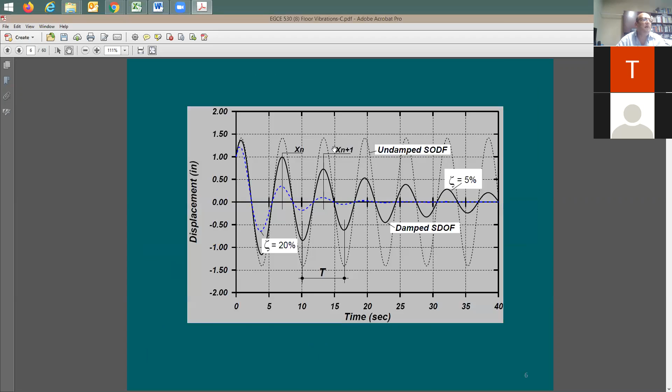Because usually when you have any vibrating system, the final vibration is going to be a combination of all the modes. So at the same time that mode 1 is happening, also some of mode number 2 is also going to be happening.

So just imagine that mode 1, the pure mode 1, is going to happen when the entire beam is just going to be coming up and down like this, right? It's going to be going like this, up and down. At the same time, while it's going up and down, also a little bit of mode 2 is going to happen. And we call this the participation factor.

If you recall this term, participation factor, yes or no? Yes. Okay, all right. So this is also one of the things that's going to be happening, that you have a combination of all modes happening at the same time. So the final vibration is going to include lots of other modes.

But heavily, it's going to be mode 1. So mode 1 is going to be like the control one that you can see with your eye. Maybe combination of mode 1, 2, and 3, maybe the fourth mode also is going to happen. So you're going to feel it that while the beam is just going up and down, also a little bit of mode 2 is happening.

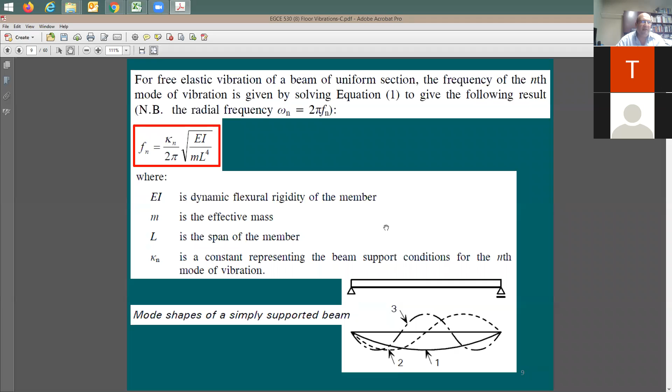So you see here, the final case, unfortunately it is tough to draw it here for you, but I will do my best. Let's say the beam is going to be coming like this, mode 1, and at the same time it's going to be doing this. Here is going to be right in the middle, and then continue this way.

I'm exaggerating here for this deformation. This deformation is going to be very small. So something like this is going to be also happening, if this makes sense to you.

Or maybe something like this, and also something like this. Let's say this is going to be going down, it's going to be going up. So this point is going to be right here in the middle, and this point is going to be like this. So what I'm drawing here is a combination of mode 1 and mode 2, if this makes sense to you.

Mode 1 is going to be just like this solid line. At the same time, mode 2 is going to be happening. And mode 2 means that this piece is going to be going up and this piece is going to be coming down like this.

So another way we could think about it is like when we do the mode analysis and we consider the top 90% of modes that contribute to the structure. And that's why we consider the top 3. And also mode 3 is also going to be there, but let's say 90% is going to be coming from mode number 1, roughly. And maybe 3% coming from mode number 2.

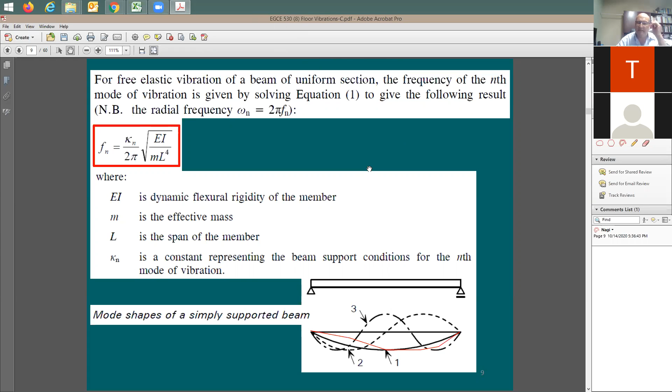So we discuss this issue, and then we say the frequency for a beam or a system can be determined with this equation here, after Allen and Murray, which they developed. These people here, they developed this research report that we're going to be looking into. You just say, if you know the deflection of the beam under sustained loads, all you need to do to find out the frequency is F sub n equals 0.18 times the square root of G over delta. Why do we say sustained load?

Why don't we use deflection for live load here? Do you guys have an answer for me?

Anyone can help me with this?

We do it for sustained load because live load can change as compared to time. For example, if it's an office building, there will be live load in it most of the time during the day, but at night, if there is no one, there will be almost zero live load. So this delta here, or this deflection, is going to be for sustained load, which means a permanent load. Am I correct, Mahim? Yes, sir. So why am I using the dead load deflection and not the live load deflection? Because dead load will be there all the time, which will cause this frequency, or which will cause the floor to vibrate.

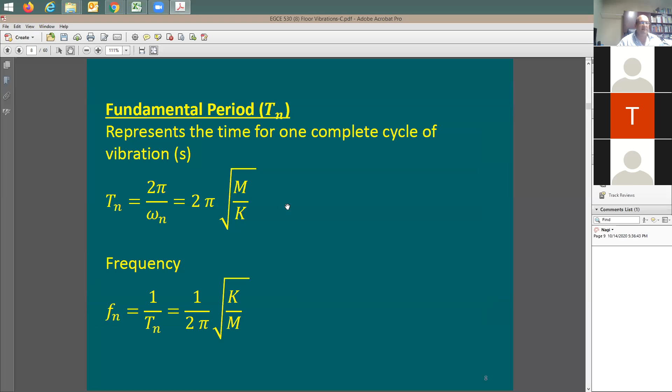Is it because it's dead load deflection, or because the dead load deflection is related to the mass? Because look at this, it's about the mass, right? Yes, sir. And you know from dynamic analysis that you need to have the mass and the stiffness. So the stiffness gives the deflection, and the dead load deflection, so they call it here sustained load. Thank you.

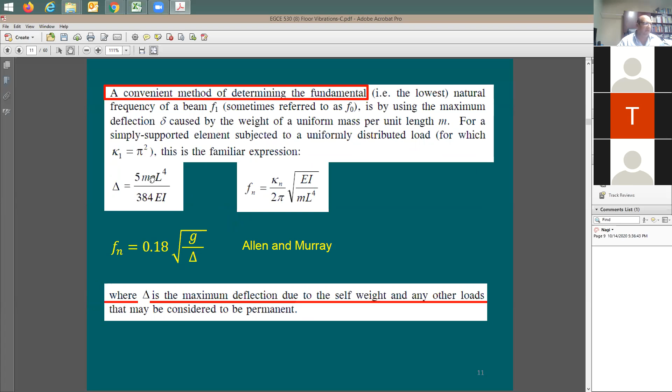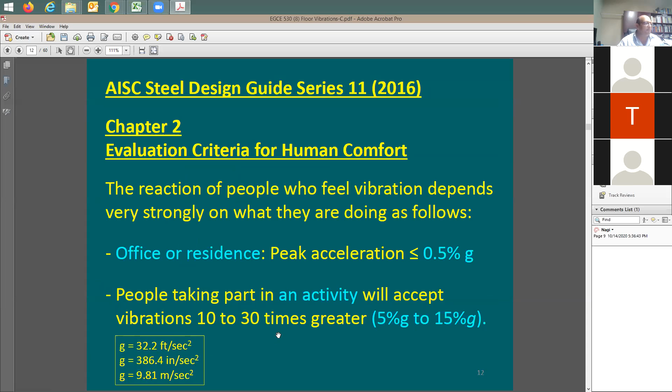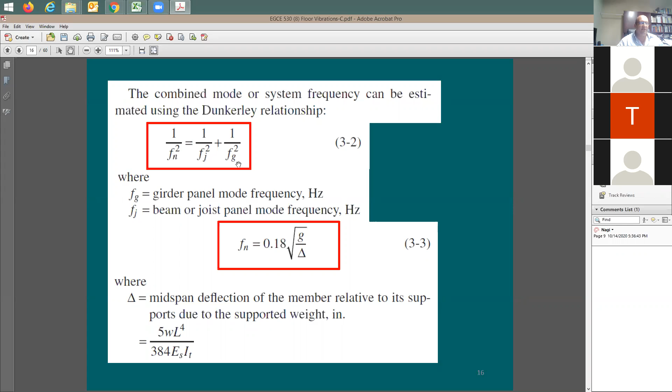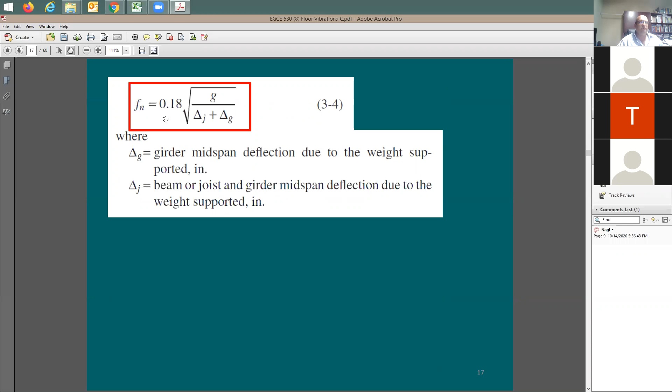And then we said if you'd like to do the combined effect between girders and beams, or here it's called a joist, this gave you F sub J for the beam, and here J is given for the beam, which is joist, and G is given for the girder. We should be able to figure out the combined frequency. If you'd like to do the combined mode between girder panel and joist panel, here it's going to be like the beam panel. What you need to do is combine the deflection in this fashion to find the frequency of the entire system.

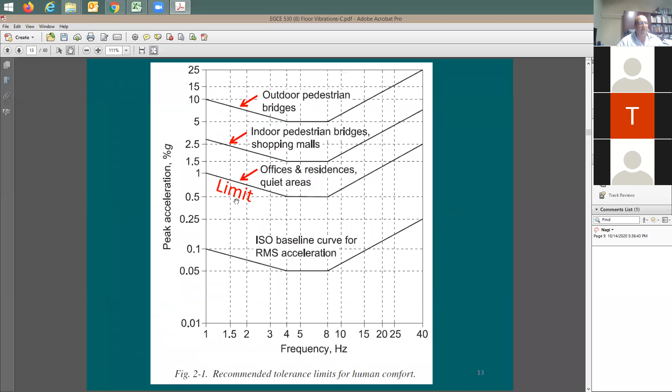And then we said in chapter 4, we're going to have these limits, and I guess this limit is going to be the same as the chart that we were just looking at, just given here in a table format.

And it says here the maximum acceleration, which is the actual acceleration or the demand acceleration, in terms of G's, as a fraction of G, AP divided by G, you can determine it by using this equation here. This is what the design guide says. I'm not going to call it the code, because actually vibration is not part of the code. Vibration is an additional thing that you do to structures to satisfy certain requirements, which is the feeling of people when they are walking on a facility, that they don't feel the entire system is vibrating and get a little bit scared.

It says here it's going to be equal to P sub 0, e to the negative 0.35 times frequency of n, and of course it depends. If you just have beams, you do it for beams. If you have beams and girders, most likely you're going to be doing the combined effect between beams and girders. You take this divided by beta. Beta now is going to be the damping ratio, combined damping ratio from all sources that you have, and then divide by the weight, and this weight is going to be the weight of the panel. We also have combined weight. So if you have just joists, like beams only, you do this for the beams only. If you have beams and girders, maybe you need to find this combined for both of them.

Here's the equation again. We understand that P sub 0 is going to be constant, so this is a real simple equation that you need to run through. The problem is, how much is this W? How can you figure it out? And this F sub n? Because look at the equation, AP divided by G, this can be one number that you need to figure out. It doesn't mean that you need A sub P only, you need A sub P divided by G as one factor, and this is actually what you're going to be comparing with the limit. And the limit is simple, we're going to say office building is going to be half percent. So now you're done with the limit. The problem is how much is the demand that you have in there. P sub 0 is constant, 0.35 also, it's just a number, beta is simple, so the real tough issue here is going to be F sub n and W.

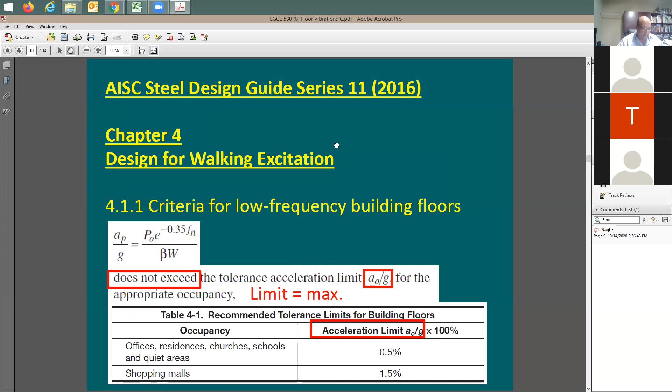Professor, I have a question. In the slide, you said that the value of P0 is 65 pounds. Where did you get the 65 pounds from? Oh, this is given, based on this analysis and study, and just given in the design guidelines. So it's like a constant. So will it always be 65 pounds, or will it only be 65 pounds for low frequency building floors?

It means the weight considered in this equation — don't forget that this P sub 0 may also include other factors. So when it says 65 pounds, it doesn't mean the weight only is 65 pounds. It's the weight causing this vibration that you compare with this limit. So for example, if you have a very light person compared to a heavier person, you cannot say I'm going to change this P sub 0 because now I'm going to have a heavier person. A regular person is at least 200 pounds, and you can't say this P sub 0 of 65 pounds is not good. No, it doesn't work this way. In this study and based on this analysis, this is the P sub 0 you need to use here. It's considered to be a constant.

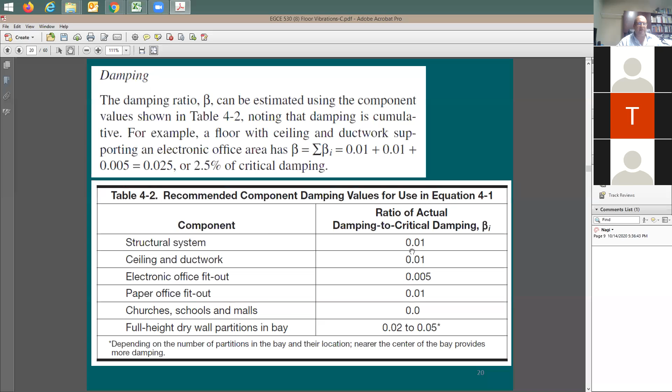Now here's the tricky part. How would you find out this panel weight, W? As I said, I'm going to have two tough items to work with: F sub n and W. Because P sub 0 is constant, just a number, and beta is simple, I can figure it out from here. So the problem is going to be F sub n and W, the panel weight. This is going to be the problem.

Panel weight, generally speaking, is going to be equal to some uniform weight that we need to come up with. It's the supported uniform weight multiplied by length by width. Length of what? Of the panel. It's not clear to me what the effective panel width is. Is it like the girder length? Not sure yet. How about the L, the member span? Is it just the member span? Not sure yet.

It says here for beams or joists, I'm going to have this B sub j, which means effective width for the beam panel. So now I'm working on the beam panel. Let's be careful here — beam panel width is not going to equal the girder length, because the girder is supporting a few beams parallel to each other. So this B sub j, effective width for the beam panel, is going to equal some factor, a constant, multiplied by...

D sub s, which is the transformed moment of inertia of the slab. So D here is used as the moment of inertia of the slab divided by the moment of inertia of the beam, to the one-fourth power, multiplied by the length of the joist.

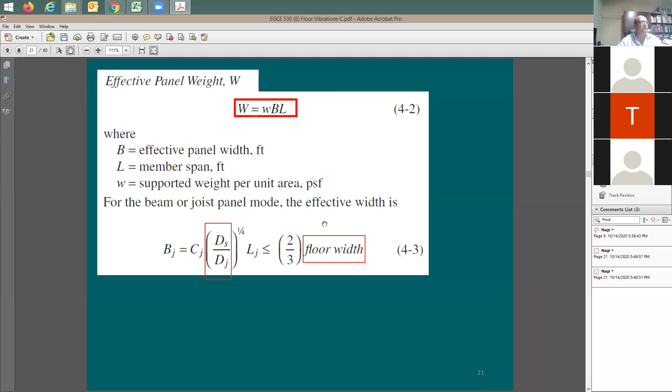Here's the same equation again. And it says usually this C sub j is gonna be equal to 2 for any interior beams. So I'm gonna say this applies to interior beams. So if you have an interior beam, C sub j is going to be equal to 2. If you have an exterior one, which is parallel to the edge of the concrete deck, it's going to be equal to 1. So understand this.

This means if you have any steel beam and you have concrete, like you have the deck on both sides of the beam, you're going to be taking this C sub j as equal to 2. So this is the number of deck flanges, or number of sides with concrete deck. So if you have it only on one side, which means it's going to be like an edge beam, use C of 1. If you have it interior, it's going to be C of 2. So this is simple. Now I understand this.

So okay, it says here ES and EC, I understand both of these, right? We are familiar with this, the modulus of elasticity. We understand it for concrete and for steel. Now here's the new part: the joist or the beam transformed moment of inertia. Beam transformed moment of inertia - what does it mean by that?

I understand transformed moment of inertia, but it says here you need to find it per unit width. Width of what? You're going to have a few beams here running next to each other, right, with a spacing of S. So what you need to do is find the transformed moment of inertia for each beam and then divide by the spacing. Does this make sense? Spacing between what? Between beams. So what you're trying to do is find out the average moment of inertia for the beam in the beam direction itself.

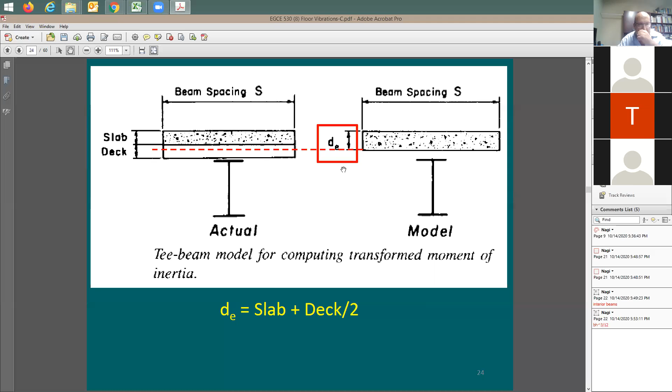Going back here to that slide, okay, now I need to find out the moment of inertia for the slab. Divide this by the moment of inertia per foot for the beam. Okay, now I did the slab and I have done the beam, but also I need to find out what n value should I use here in my analysis.

It says here's dynamic modular ratio. In the past, for the static modular ratio, we used to say ES divided by EC. In the dynamic, we're going to be adding here a factor of 1.35. So here's a new change. Don't just take the old n that you're used to. No, now it's going to be ES divided by 1.35 E sub C.

In here, I have definition for moment of inertia for the beam, length of the beam or the span, the spacing, which means beam to beam spacing, and effective depth, which is explained right here in the slide. So I guess we're clear on whatever we're looking at here. So are we good with the 3 slides? We understand this, we understand these factors, we understand the C value is getting either 2 or 1.

It means number of sides for a steel beam, number of deck sides. DS is going to be the moment of inertia for 1 foot of the slab, that's why we divide here, we are just taking 12 inch. And DJ is going to be transform moment of inertia for the steel beam itself. And L sub J is going to be the beam span.

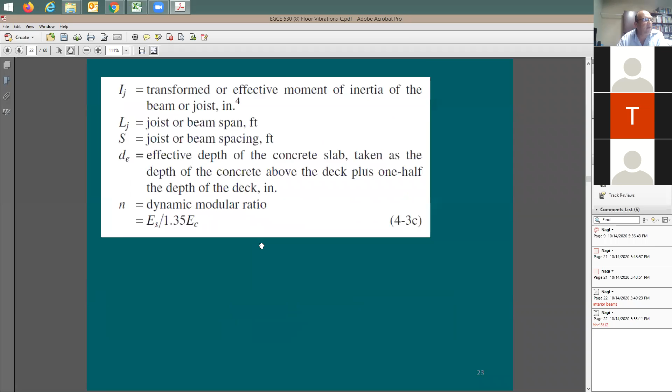It says here, how about this C sub J? C sub J, if I may take you back also here, C sub J, we have 2 values, 2 or 1. Depends on number of sides of the deck, composite, or number of sides around the beam that you see a metal deck.

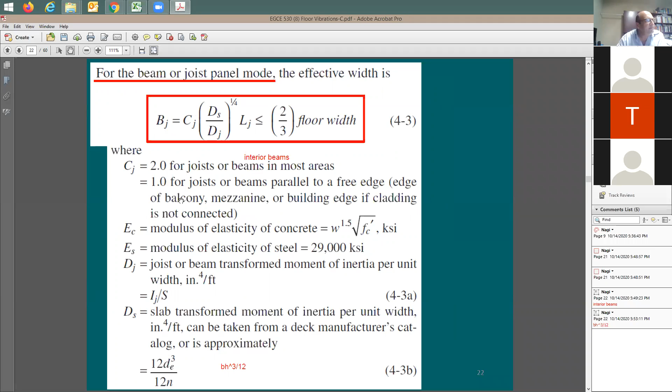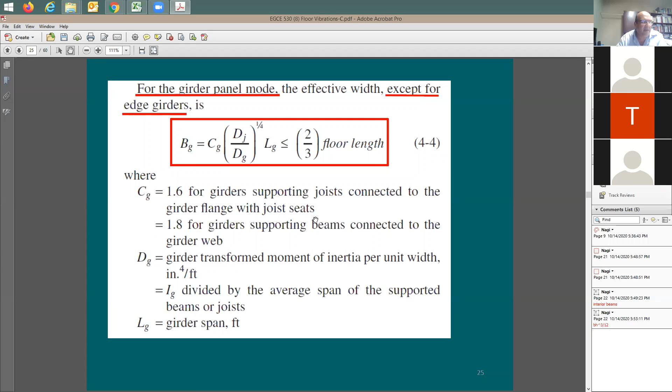It says here C sub G is going to be either 1.6 or 1.8, but I'm not very clear why. I'm just going to go to the next slide.

This is one of the added slides that I put there. This is a standard beam-to-beam connection. This is going to be the girder, and this is going to be the steel beam. This is a very good detail.

This beam is connected to the girder through a shear tab. If you remember the connection design we did in the connection lecture, we have something very similar to this. We have this plate, and this plate is welded to the girder. You're going to have bolts, and this beam gets attached to this plate with these bolts.

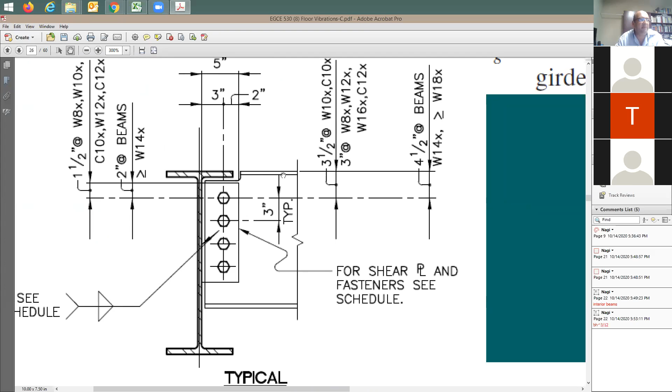Now what is the difference between this system and this system? If you look at this system, the beam or joist is sitting on top of the girder, so this beam is restraining the top flange, and it is not attached at all to the web of the steel girder.

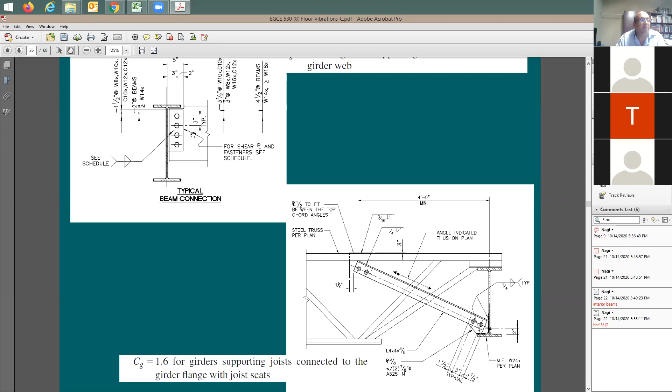But in here, I have a direct connection between the steel beam and the girder web. So here I'm restraining this girder when it vibrates, so that this web is not going to be freely going up and down, but it's going to be restrained with the steel beam connection.

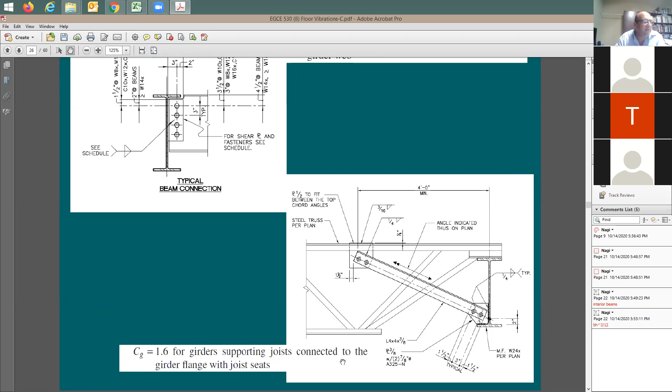So in a case like this, C sub G is going to be equal to 1.8, as it says here, for girders supporting beams connected to the girder web - this little thing. And here it says C sub G is going to be 1.6 for girders supporting joists or beams connected to the top flange of the girder.

So now I understand this. Let me go back one slide. I guess now I'm clear about C sub G, 1.6 and 1.8, and the picture is going to be a perfect illustration for it.

I understand the span of the girder. Now what is D sub J? I understand D sub J - this is the same one I've used here, look at this. It's the joist or beam transformed moment of inertia per foot, divided by the spacing between beams. So I'm clear on this.

Now the new thing is going to be D sub G. What is D sub G? It's going to be the girder transformed moment of inertia per width.

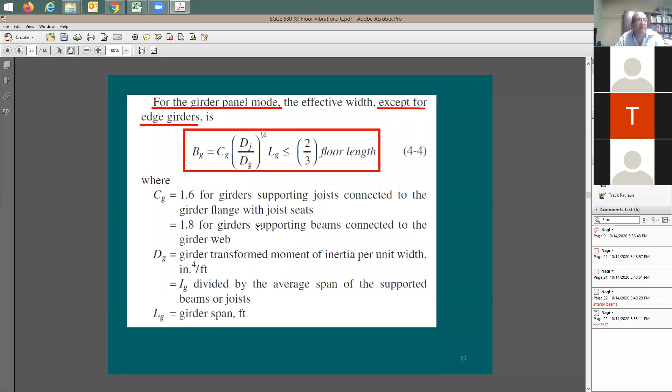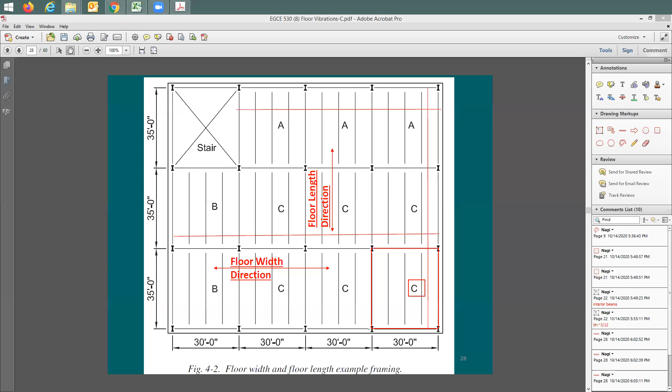All right, let me repeat this again, please give me your attention. I've noticed that some people are not giving enough attention.

If you'd like to do analysis on this bay, let's just pick one here, forget the name of it, call it A. I'd like to do analysis on this bay. Are you guys with me? Are you listening? Yes, Professor. Are you somewhere else?

If I'd like to do analysis for this bay, and they ask you about the building width and length: the building width is this dimension from here to there, and the building length is this dimension from here to there. So the building length is parallel to the beam, and the building width is perpendicular to it. For this panel or bay, the length is 105 feet and the width is 90 feet.

Are we good? Yes, Professor. Okay, let me move to another bay.

Let me check this bay. I'm looking here for my analysis. What's the building length and the building width? So where's the building length? Building length is from here to there, right? This is the building length when I do analysis for this bay, and the building width is from here to there. How much is the width? You can say 120, and the building length is 70 feet.

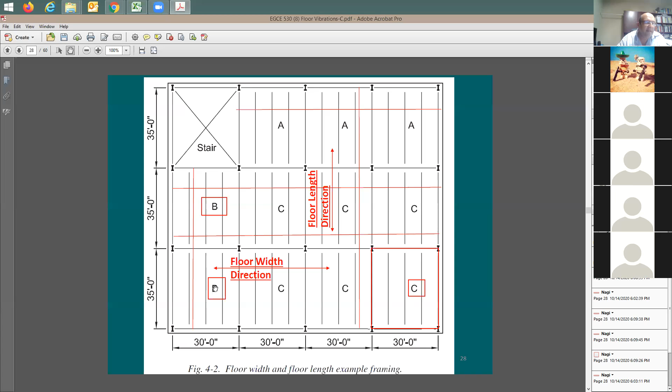Maheen, help me with this bay, forget about the name of it. How much is the length of the building if I'd like to do analysis on this bay? The length will be 35 plus 35, 70 feet for the length. How about the width? The width will be 120 feet. Thank you.

All right, I'm going to go back to Bakri. Are you there? Still alive. All right, okay, I'd like to work on this panel. I'd like to find out the building width and length.

How much is the building length here? 90? Oh sorry, no, 35 times 3, 105. Okay, how about the width of the building? 120. All right, thank you. You're welcome.

I guess you can see the summary here. For each one of these bays or panels, the width is going to be from here to there, and the length is going to be from here to there. This is why this is the same as this. This is why they are labeled this way.

Now I'm looking here for the effective width, which was the issue. In my analysis here, I was just looking at it and saying, tough equation, I don't know where it's coming from. I'm trying to understand it, but I'm not clear.

We said that the effective width of the panel, of this panel here, effective width of the panel. This slide is about the effective width of the panel. Which panel? For the joist panel, for the beam panel, and the girder panel.

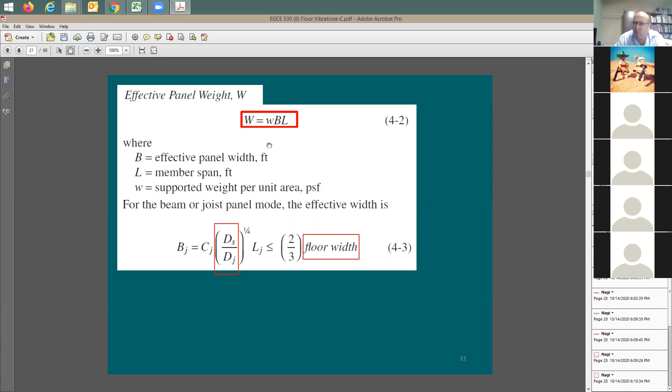Is this going to be from one beam to another beam? I said no, actually we have a way of doing it.

Now moving forward, look at this, the effective width of the panel. So if you'd like to find out W, which means the total weight used here for the beam panel, it's going to be equal to W, uniform weight, times the length of the beam, L sub J, multiplied by B effective, which B is going to be BJ. So where's this BJ? It's this one here. What is BJ? It's some width of a few beams, not just for one beam.

And it needs to be less than 2/3 of the floor width. So if I'm working on this panel here, how much is the floor width? Can someone help me? The floor width is 120 feet. Exactly, 120. So the maximum B sub J width is going to be equal to 2/3 of 120. Are we good? Now you understand the floor width here in this case?

Yes sir, in this equation it says usually less than or equal to 2/3 of the floor width. So if you are working in panel A, the floor width is 90. 2/3 of this is going to be 60 feet. So the maximum width for this, the limit, is going to be equal to 60 feet.

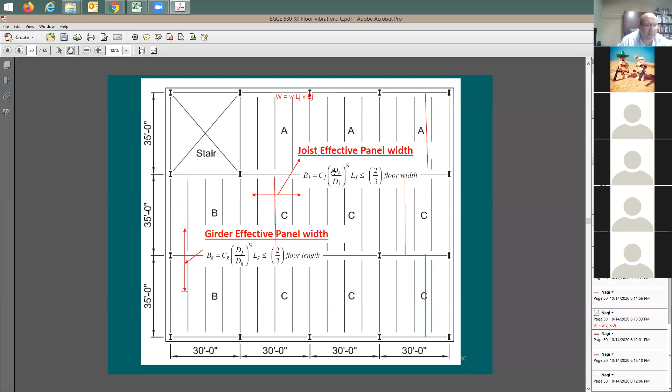How about DS and DJ? Where'd you get this from, Bassem? Do we have tables for them, or do we do calculations, or what? So from the guidelines we get DS would be for the slab, and DJ would be for the beam.

And what is this D? Is this the depth or the moment of inertia? It represents moment of inertia divided by the spacing, or from one beam to another beam. This is what we call here S, so you divide by this. Thank you, yes Bassem, very good.

So okay, now it seems that when I do the vibration analysis, I'm not just going to be taking one beam, I need to take a few beams altogether, because this B sub j is going to be based on maybe a few beams altogether. And this is going to be determined based on this equation. Okay, now it makes sense.

It's going to be a ratio of the beam span. You see this L sub j, you take a ratio of this L sub j. So let's say if L sub j is equal to 35 feet, and this factor C sub j times this is equal to, let's say, 0.6, you're going to say now the width is going to be 0.6 times 35 feet, or 0.5 times 35 feet. So talking about maybe 18 feet, 19 feet, something in this range. Compare it with 2/3 of 120, which means how much?

Let's say 2/3 of 120, how much is that? 80 feet? 80, yeah, about 80 feet. So it's going to be less than 80 feet, then you go ahead and use 18 feet. The spacing here, how much is the spacing between two beams here?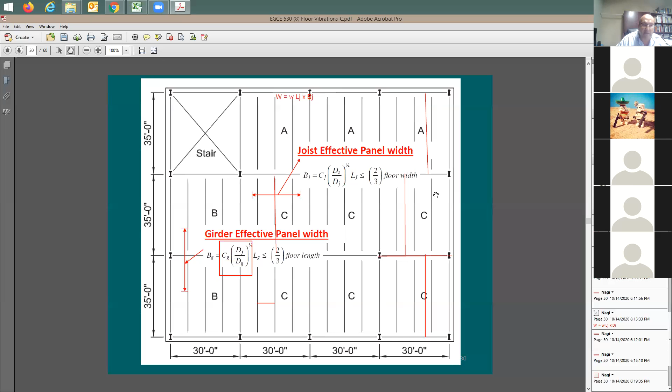I'd like to talk to Elizabeth. Go ahead, Elizabeth. The LG would be the length of the girder. Yeah, which is how much? Well, that would be 30 because it'd be across the way. Correct. How about if I'm working on this girder? How much is this? That's 30 as well. 30 feet. Thank you very much.

So it's going to be a fraction or a factor, because sometimes it can be longer. It's going to be a factor multiplied by the length of the girder. And this factor is going to be equal to 1.6 or 1.8. It depends on the girder and the connection of the beam to the girder. You're going to come up with this coefficient. And then you need to find out the moment of inertia dj for the beam divided by moment of inertia for the girder.

And with that, you can do also this girder panel analysis. What do you mean by do girder panel analysis? So I'm going to take you back, and please stay with me, stay focused. I'm going to go back here and show you a few slides.

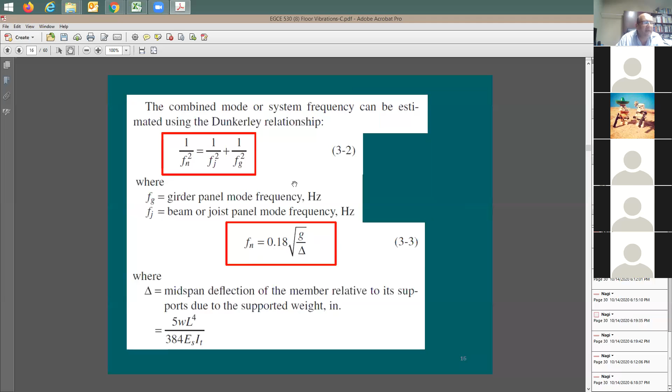I'm going to say when you do here F sub n is going to be equal to 0.18 square root of G over delta, you're doing it for what? Now we do this once for the beam, or the joist, and then you do it once for the girder. And then after that, you do the combined effect. You can't do this unless you know the weight, which weight you're going to be using. And also in this equation here, you need to find out the combined weight between girder panel and beam panel, right? So this weight is going to be important.

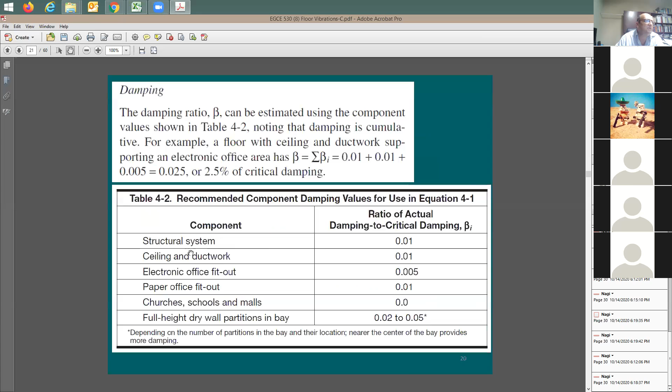So this is why you need to have the length and the width for the panel. Let's say that's not 100% clear. Of course, an example, and if I have the steps, it's going to make my life much easier. Okay, good.

They also give you some more information here. They say the effective concrete slab is going to be how much? You take minimum of 40% of L sub J — what's L sub J? The beam or the joist length, and the spacing S. So this is going to be the effective concrete slab width.

And when it comes here to effective concrete slab width, when it comes to girder, why do I need this? Because you need to find out here the moment of inertia of the slab and the beam all together. So if you want to find out dj, how would you find it? I recommend just doing it for one beam and the concrete slab within a distance of S.

I'm going to take you back here to composite beam design. In composite beam design, if you recall, we said you're going to be taking S or L over 4. You remember the span divided by 4? Yes, Professor. Find out the effective width.

So to find out the effective width for the concrete slab that's working with the beam or the joist, you have some guidelines. It says here, take 40% of the span of the beam, or take the spacing S. You take the smaller value of the two.

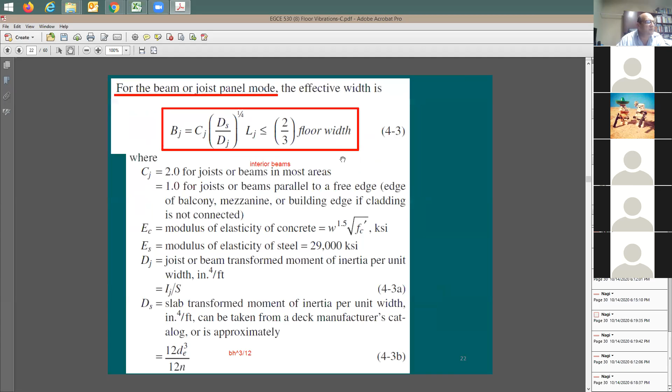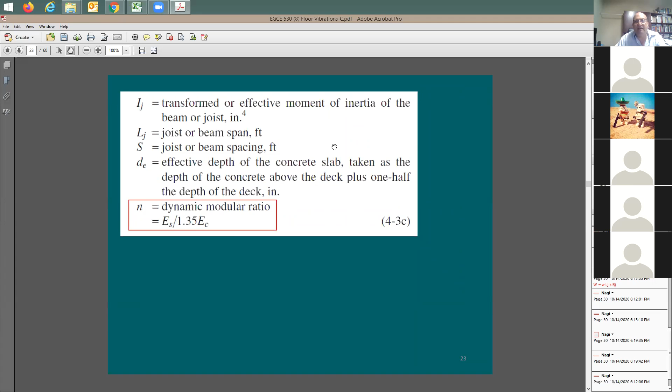I'm going to take you back to it so that you remember. You see this? ES divided by 1.35 EC - this is what you call the dynamic modular ratio. So the dynamic modular ratio is going to be completely different from the static modular ratio. The static one is just ES divided by EC, and here it's ES divided by 1.35 E sub C. So the factors you are used to are going to be slightly different in this case. Understand this.

Moving forward. So now I understand exactly how much concrete I'm going to be using, for different types of panels - for example, for panel B, A, and C, they have different lengths and widths. So we calculate separately for each panel, right?

Yeah, if you are doing this in real life, in real application, you need also, you know, this. Usually you're going to have a software. With this software, you're going to place all the columns, and then you're going to build this - it's going to be like visual, or maybe imported from a CAD system. Then all you need to do is click on the beam and the software does the vibration analysis for you. So if you'd like to do vibration analysis for the entire floor, you just hit the button and you're going to have maybe 200 pages of calculation just for the vibration analysis of the floor system, right?

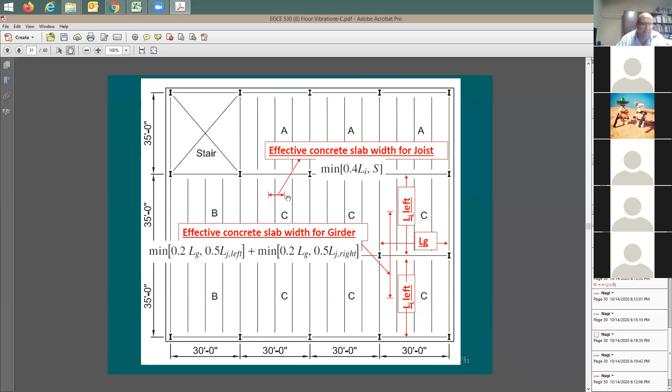How about for our course here? What should I do? For our course, I'm going to be asking you to do vibration analysis for one beam or for one bay. That's it. I cannot ask you to do it for all of them, because in this case it's also simple - all the spans are the same, and all the column spacing or the girder length is going to be the same, the girder span is also the same. So they made it very simple here. You still have 3 cases - 1, 2, and 3 - that you need to work on, but for us, we just need to pick one beam and that's going to be enough for your work. Okay? All right.

How about the effective panel weight? Now we said the panel weight needs to be the combined weight. How can I do the combined weight here? Because look at this - when you look at the width, you say this is going to be the panel, or the beam panel. I'm going to take it here aside and put it right here. You can see this is the beam panel.

How about the girder panel? I'm going to say this is the girder panel, here's the girder, right, going to be taken - maybe this is going to be the girder panel. So the weight of the girder panel is going to be maybe this weight. The width I'm going to bring from here. How about the length? Let's say roughly it's going to be the girder length.

How about this area here? What is that? I'm going to say this here is going to be the panel area - length by width, where the width is coming from here, and where's the length? It's going to be the beam length.

How do you combine them to do this combined mode? Should you just add this to this? You cannot add these two weights to each other - it doesn't work this way. You need to combine them in a certain way.

So what this guideline says is the combined weight, or total weight, is going to be equal to - look here, you find out deflection of the beam and deflection of the girder, and then you find out total deflection, and then you find out the participation factor. So you say delta sub j, which means deflection of the beam, divided by the total deflection of the beam and the girder, multiplied by the weight or effective weight of the beam panel.

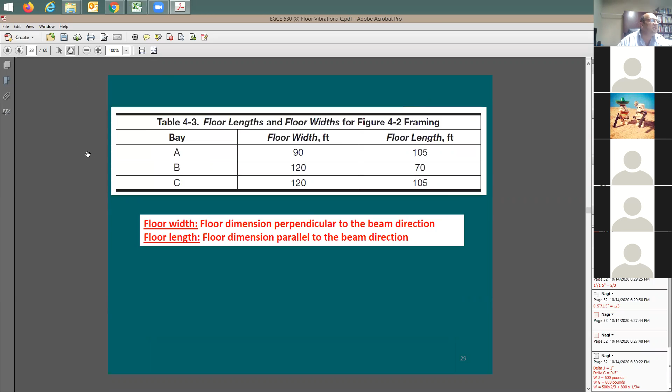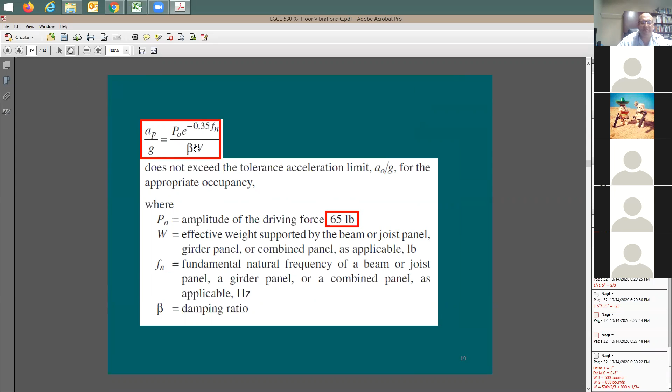Which analysis? I'm going to say the analysis that says AP divided by G. You remember this AP divided by G? Let me take you back. We're on slide 32, let me go back to this slide. This equation here, it's going to be the actual W that you need to use in your analysis. When you do the combined analysis, this needs to be the W that you use. This can be this way because you combine here the effect of the joist and the girder. So we're going to go back here to 32. Now we understand this equation, have an idea how it works.

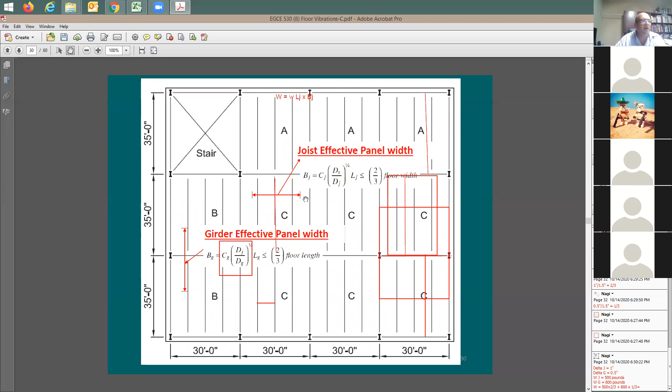And then it says here, for some cases, you do your analysis, and then you see here the BJ. What is BJ? Let me go back here to this, just to be sure that you understand it. How much is BJ here? You say BJ is going to be from here to there, right? Usually BJ, in lots of cases, is going to be smaller than the girder length, correct? Okay, how about if this BJ is larger than the girder length? What's going to happen? Now this system here wants to vibrate. What is stopping it from vibrating? What's helping you out? I'm going to say what's helping me is going to be these two columns.

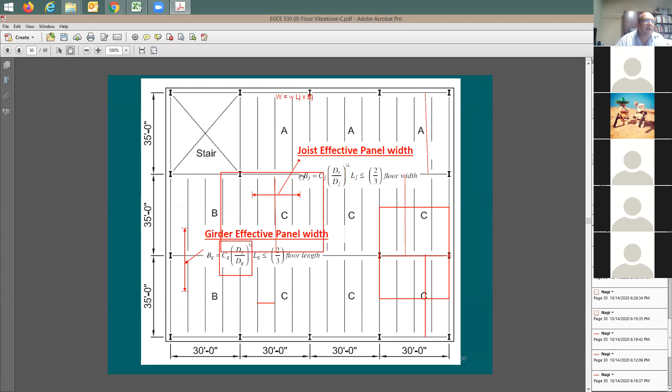This panel, when it vibrates, is going to be vibrating only in this direction. The beam is going to be going up and down, but not the entire width, because I have a problem here with these two columns. It's going to be stopping the vibration, resisting the vibration, so the effect of the girder is going to get reduced. You guys agree? Yes, kind of. Okay, so the design guideline recognizes this issue.

And they're thinking here, in a case like this, when the girder span L sub G is smaller than the joist panel width, so when the panel width is larger than the span of the girder, you can reduce the deflection that you just calculated for the girder, by the ratio of the girder length divided by the panel beam width, or the beam panel width.

And they said you're going to have a range from 0.5 to 1. So the question is, if I did my analysis here and find out that L sub G divided by B sub J is going to be equal to 0.2, what should I use? It's going to be 0.5.

How about if the span of the girder is going to be larger than the beam panel width, which means this factor here, when you calculate it, is going to be more than 1. Should I use more than 1? No, it's not going to happen, because in this case, just take the girder length and take delta sub G as is. Don't try to reduce it or increase it in this case.

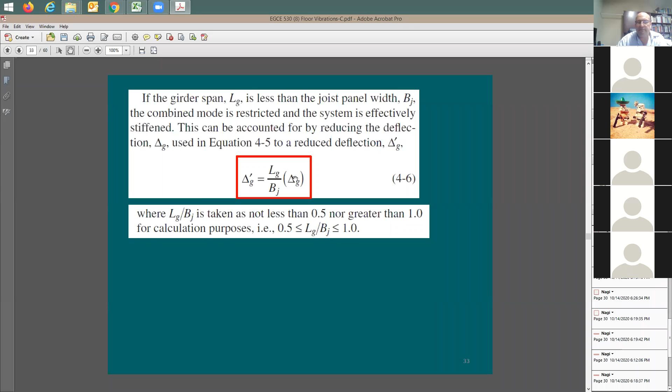Now, do you have this procedure, algorithm, or list of steps? Do you have steps that you need to do? I'm going to say yes. This design guideline includes the steps for everything that you need to do. So if you're doing an example, homework, or working on your project, you just need to follow the steps here. This is going to be so simple, especially when we have an example.

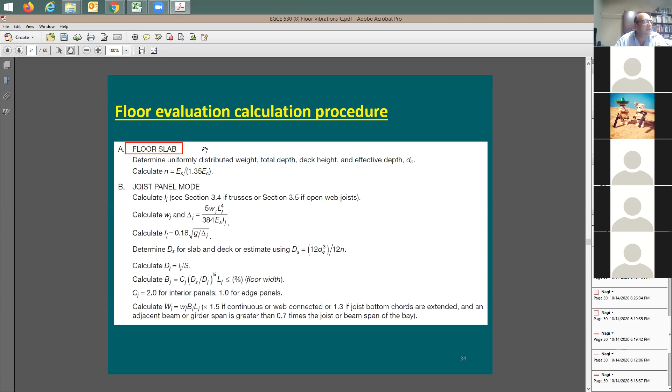It says number one, you need to work with the slab, which makes sense. What do you need to do here with the slab? We need to find out the dynamic modular ratio. This is going to be so simple, right? You know about this. Yes, and also you need to find out the effective depth of the slab.

After this, you need to work on the beam panel. Beam panel or joist panel, they're the same. You need to find out this I sub J. And this says, if you have a truss, and this is a beam, right? Because in many cases, the system is going to be trusses supported by girders. You're going to say, where's this at? Remember, we're at slide 34.

I'm going to go back and look at some detail, like in here. What do you have here? You have an open web joist, or you have a truss. This looks like a truss, it's not a beam, that's why they call this a joist, and it's supported by the girder. But here you have a beam supported by the girder. So what they say,

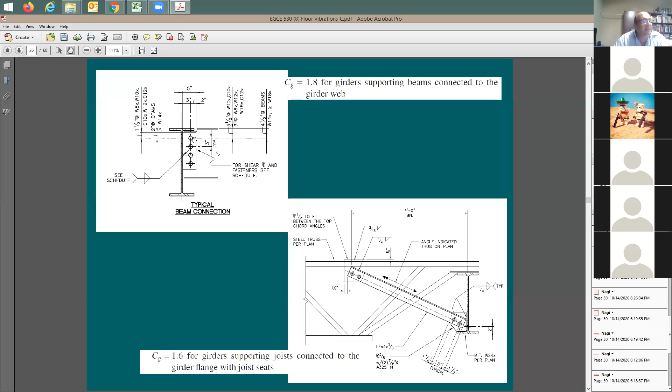if you have a truss, you go to this section, right? If you have an open web joist, you go to this section. So there are certain guidelines. I'm not going to be working on trusses or joists, I'm going to be working on just steel beams, composite beams. So forget about this, but there are certain guidelines for it and how to do the moment of inertia for it.

And this says here, figure out W of J. What is this w of J, lowercase? It's going to be uniform weight, like the dead load that you have calculated out. Also, it may include some permanent live load, so it depends on your analysis. If you're running a software, usually it says what percentage of the live load you'd like to include when it comes to vibration analysis, or how many pound per square foot you'd like to include out of the live load.

Some people would put 10 PSF, 20 PSF. They say, usually we're going to have people there, so when you're talking about vibration, I'd like to include maybe 20 PSF. Because if there is no live load, what vibration are you talking about? If there is no live load and you have only dead load, let's say at night time and all offices are closed, in this case you're going to say, well, there is no live load.

Why do you care about vibrations? You care about vibration when you have some live load in there, people moving or something, or maybe furniture. You cannot just assume you have zero live load. Usually you're going to be adding a little bit of live load.

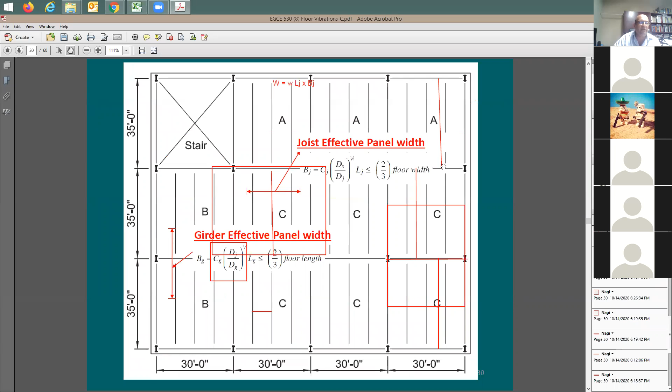I'm going to take you back here, this is now slide 30. So it's going to be this equation. I need to run this equation and check if it's going to be less than or equal to 2/3 of the floor width. If you're working on C, it's going to be the floor width from here to there. It's going to be very important to identify the floor width when you do the analysis.

Okay, I guess everything here looks okay. And then it says here, when you calculate this W of J for the beam panel, if you have continuity in the beams, use 1.5. In our case, we don't have that. If the joist bottom chords are extended, use 1.3. I don't have that, so I don't have this factor here. So just use this.

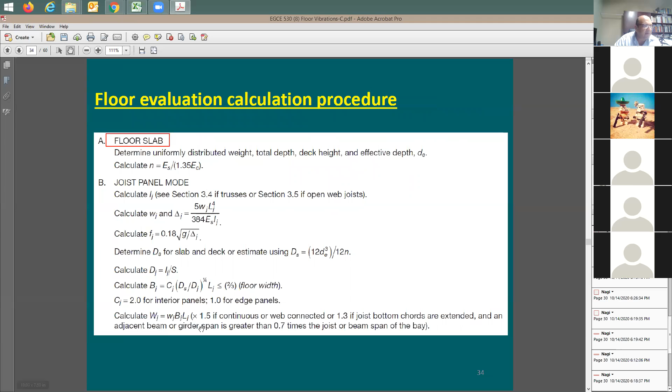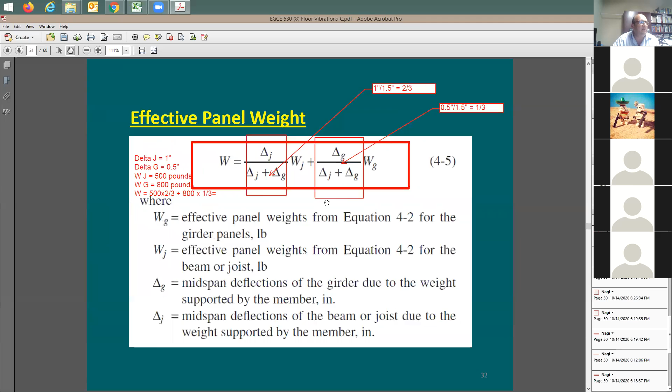All right, how about the girder? I guess in the girder you're going to be doing the same thing. You have this IG and the width of the slab. I'm going to go back a few slides. The width of the slab is taken from where? This is here to find the effective width of the concrete slab when you do this IJ or I sub G for the moment of inertia, and after that you divide by the spacing between beams. Okay, same thing: effective width of the slab for the girder.

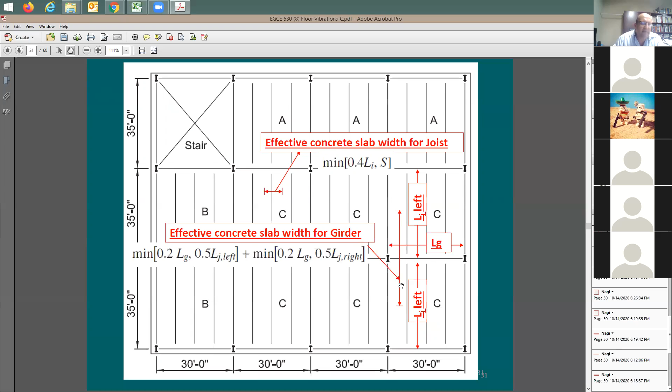I have this equation for it, it's going to be minimum. You have the right side and left side. After you do the moment of inertia, you divide by the spacing between girders, which means the span of the beam. Okay.

So what do you do after this? You do deflection, then you do frequency. And then you do D sub G, moment of inertia divided by L sub J, and of course you'll find the width. Then you understand if you have shear connectors like our standard beams, or if it's on top — on the top it's going to be 1.8.

And then what do you do after this? Forget about this 1.5, we don't have it, we don't have continuity between beams. So I'm not going to include this 1.5. Great.

After this, you do the combined panel mode. Now you have delta J, delta sub G, and this 0.18 to find out Fn, the natural frequency for the entire system. And then you do the effective weight, combining it with this participation factor, if you like.

What do you do after this? Now you have all the elements, you can figure out AP divided by G. What is AP divided by G again? It's going to be the acceleration of the system based on this equation, P sub 0, the 65 pounds.

Now you have e to the negative 0.35 F sub n divided by beta. You have beta — the floor system is going to be 1%. You have partitions, ducts, ceiling, and all of that. And you divide by the weight, which weight is going to be this weight here.

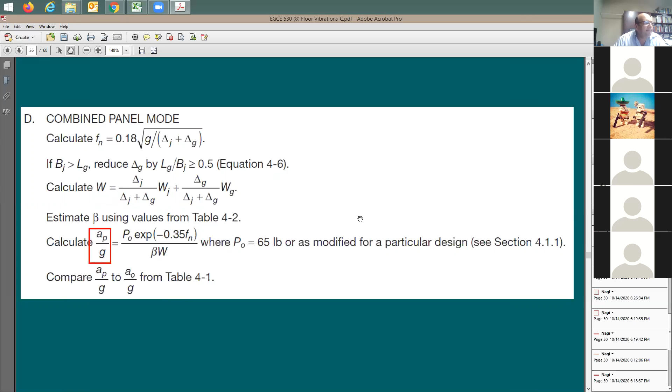All right, example. The example here is very detailed. They give you a girder, some steel beams.

Of course, I understand that live load is going to be what? It's going to be 50, the occupancy. This is what you designed for. But this is the expected live load to be there in almost all cases, right? This is going to be the additional live load that I need to include when it comes to analysis for vibration only.

It says there is ceiling and mechanical equipment, it's going to be also add some beta. Superimposed dead load, this is going to be the additional dead load. This is going to be 4 PSF. And then it says the spandrel girder is supported by exterior cladding for vibration.

The building is 5 bays in the east-west direction. So they give you here some description, right? They say 5 bays in the east-west and 3 bays in the north-south. So in this direction here, it's going to be how much? It says here 5 bays and 3 bays.

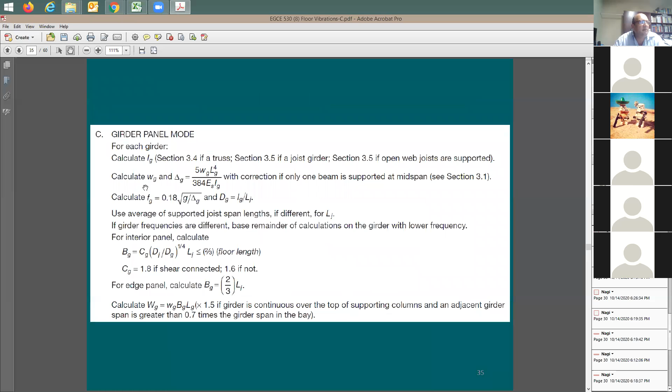Okay, good. Again, we're gonna be following the same steps that was provided to us here. Slab, joist, and then you have the girder, and then combined effect, and then you find the AP divided by G. So it's gonna be fun when you go through this.

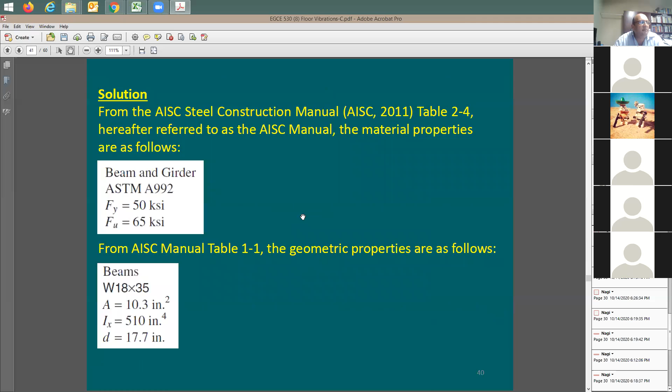All right, so I want you here, and also you have here a quick plan view that I developed for it, right? For the beam length and width. All the beams are running in this direction. Remember this. So this is gonna be the beam length or the floor length. It's gonna be 105, and the width is gonna be 150. It's gonna be from here to there. So all the beams are running like this, right? This is gonna be the direction of the beams.

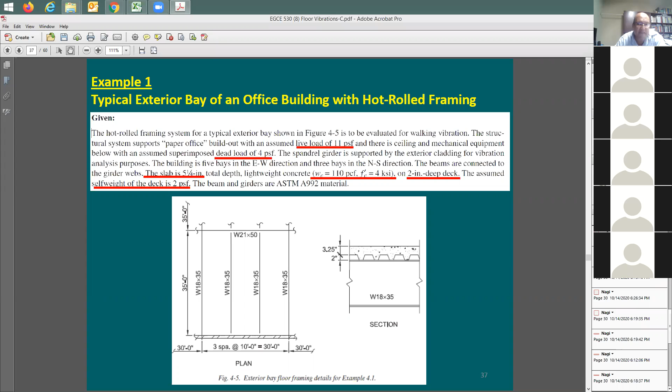Sir, just to make sure, it's on Friday 6 p.m. to 10 p.m. and everything till now is included in the quiz, right? Yes, it's gonna be a simple quiz, it's not gonna be a tough one. Okay.